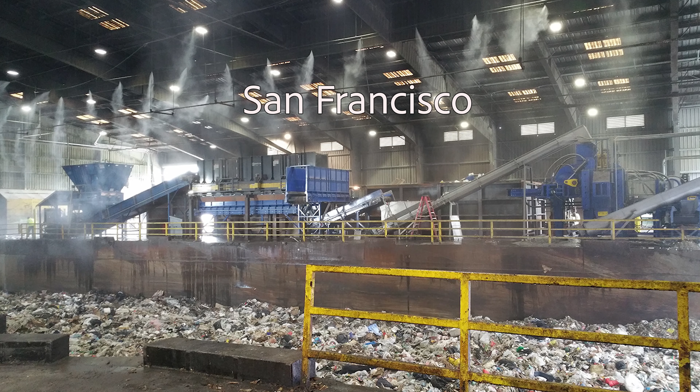The Energia team has acquired, developed, and integrated technologies that allow us to maximize revalorization of solid waste. I'm Rob Murray, Vice President of Project Execution for Energia. I'm building projects around the world.

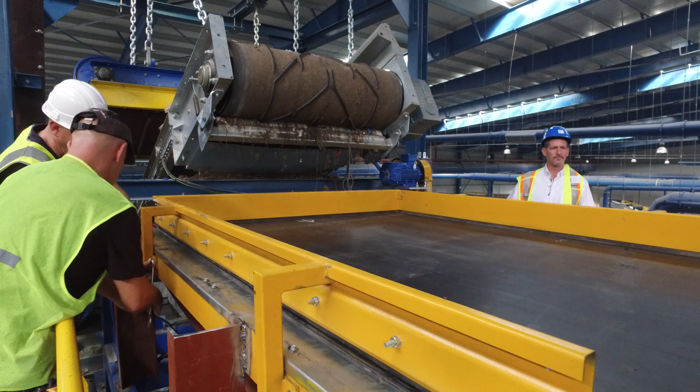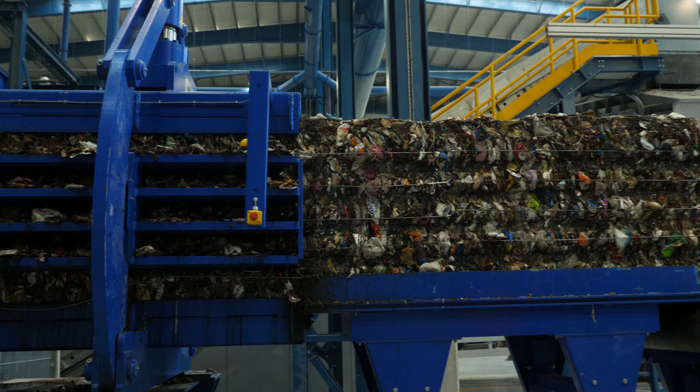The plant is fascinating to us from an engineering perspective because it uses state-of-the-art technologies to receive the trash and break it down into its fundamental components. The economics are helpful because the recycled materials can be sold, which helps offset the cost of operating the plant.

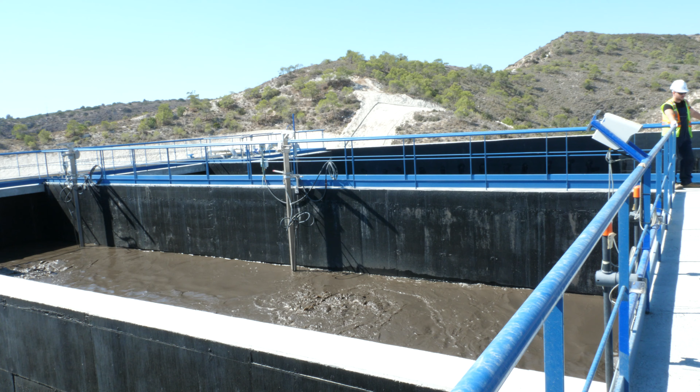Biogas generated from the organic portion of the trash is converted into electricity. Ultimately, the biological component becomes a fertilizer, which is reused in land application, and all the wastewater from the different areas of the plant is collected and treated and put through reverse osmosis, proving the concept that trash is a resource and the landfill is obsolete.

If you look at food waste and the amount of greenhouse gases produced by it around the world, it's actually as much as all of the transportation on the planet combined. We also lose the fertilizer value to restore depleted soils of both fertilizer and organic content.

Limassol had a big problem with waste. Two years ago, they were landfilling every bit of waste that came in. So we were asked to make a plant that would treat the incoming waste and produce recyclables, secondary fuel, clean the air, clean the water, with only a very small percentage of waste still going to the landfill.

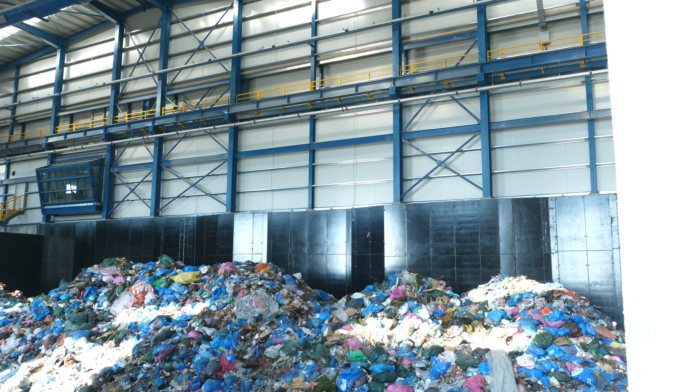The waste comes to the plant from the municipal trucks. They're weighed before coming up to the plant to know exactly how much garbage we're receiving. Then they dump all their waste into a tipping pit, a large bunker where we can store the garbage and process it.

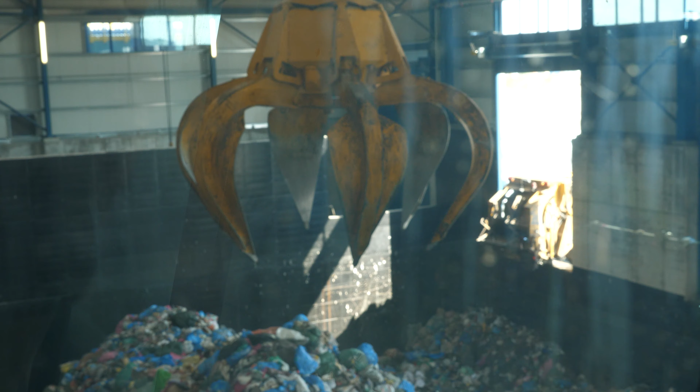From this pit, we have two overhead grapples that collect the waste and send it into the first step of the process, the bag openers. Most of our waste comes in garbage bags, so before we can access the waste inside to treat it, we need to open those bags.

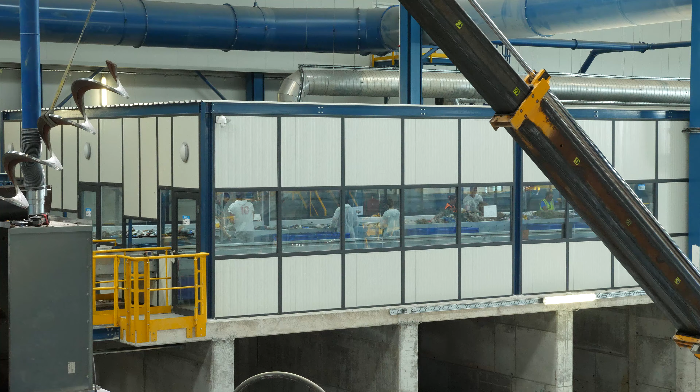Here we have pickers that take out specific items from the waste stream. We remove glass at this point, and we remove long pieces of plastic film, electronic waste, and medical waste.

After the manual sorting, we have magnets which separate the large metallic pieces out of the waste. After these magnets, we have machines called disc screens. The disc screens serve to separate the organic material; waste smaller than a pre-programmed size falls beneath. So this is a way of separating the waste by size.

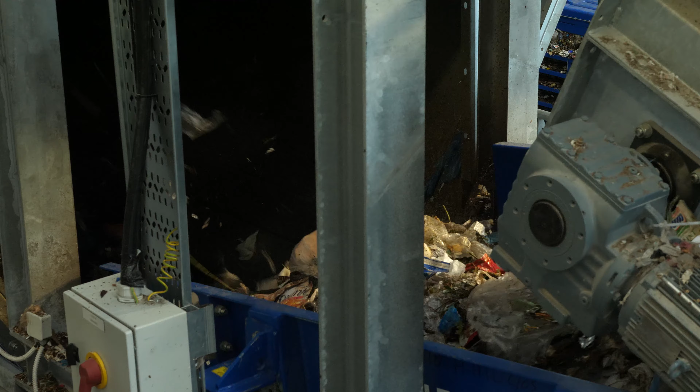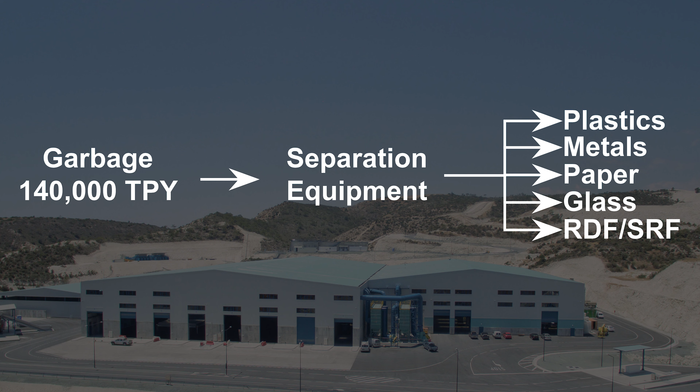Like other plants, we have separation equipment that allows us to efficiently remove the recyclables from the waste, such as plastics, metals, paper, glass, and the RDF, SRF. Unlike other plants, we have the RX that extracts up to 95% of food waste from the garbage.

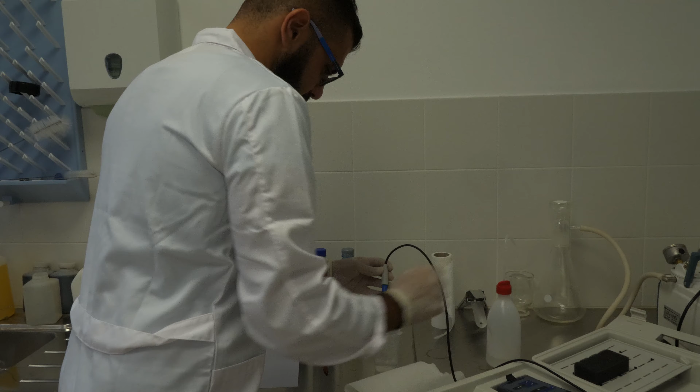This organic fraction is fed into the digesters, which is an important part of our process since it allows us to generate electricity and fertilizer, thus reducing our cost of treatment and giving back to the earth the fertilizer.

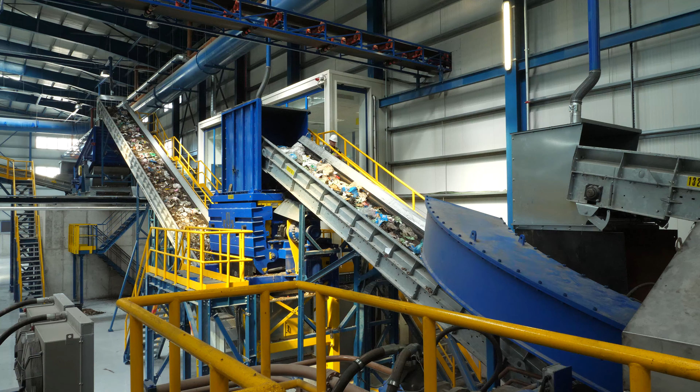The RX is a key piece of technology for this plant because it serves to very effectively separate the organics from the non-organic material. The way it works is a very high level of pressure is applied to the waste. Anything organic found in this waste is liquefied by the pressure. This paste is conveyed away for treatment and biogas production.

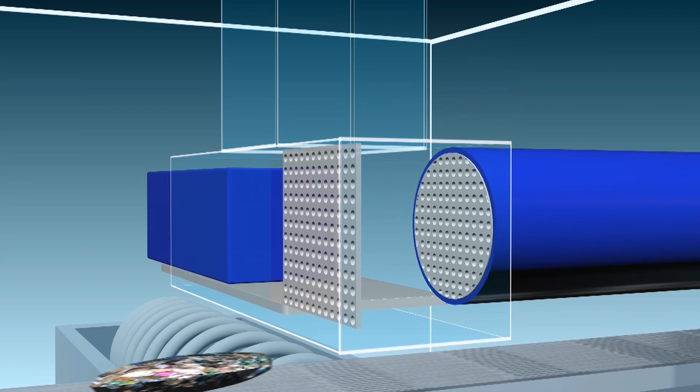In Limassol, we only send 11% of the residual waste back to the landfill.

After the mechanical sorting, and we've recovered the organic polished pulp, we digest it in these large mesophilic anaerobic digesters. They're operated at 38 degrees Celsius, and that produces a very rich biogas high in methane.

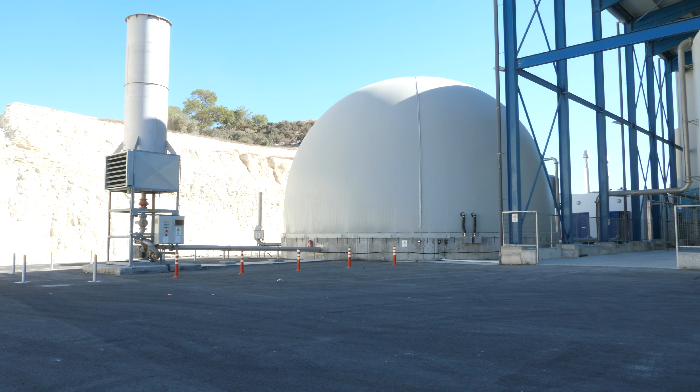The combined heat and power units generate nearly 2 megawatts at this plant, and it's enough to completely satisfy the load of our mechanical sorting facility, our wastewater treatment plant, and all of our digestion technology.

This has never been done before. We don't actually consume any net amount of water. We generate a surplus of electricity. We sell the recyclables. We're land applying a fertilizer. And the story is very, very exciting for us in the engineering world. We bring in waste and we take out clean air, clean water, plastics, paper, and fuel.

It's amazing. If you come and see the truck coming in and what goes out, then you can just be happy.

Growing up, I remember running around on the beach and wondering why there were tin cans or other things thrown around, and all this is changing. I'd like to state how proud I am as a citizen of Cyprus to see this state-of-the-art facility bringing innovation and positive change for the environment and our natural resources.

I dream of a world where we humans find ways of stop depleting and start healing. This plant, and the many that will follow, will make the world a much better place.